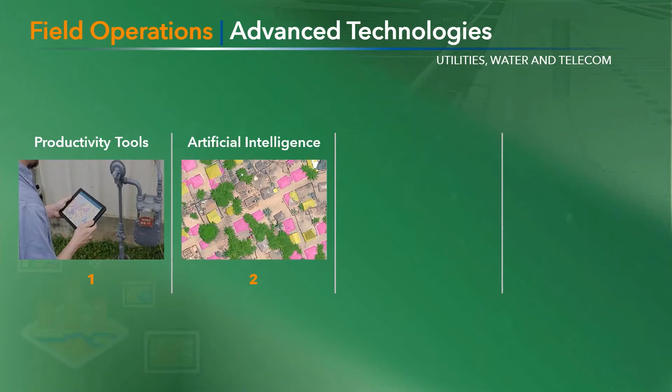Many agencies I talk to want to use imagery and drones, but it hasn't always been easy. We'll see that the state of the art to make use of imagery and drones is straightforward, allowing you to leverage new tools, manage all of the images, and focus on what's important, your infrastructure. We'll end with a look at where things are and where they're going in 3D and what visualization means to field work.

Now, clicking and typing are not great field activities, particularly when you're wearing gloves or you're out in the bright sunlight. Productive field tools leverage the worker's skill and knowledge, and they minimize repetitive tasks. ArcGIS tools work together with many built-in features to improve usability for staff. How could staff avoid a lot of typing? With voice commands and voice recognition.

How can tools remain aware of the user's context? By using barcode scanning to identify equipment and locations, smart tools know what you're working on without typing. How can staff be kept aware in real time? By using information and alerts that are based on location, smart tools know right where you are, what's near you, and then help the user. So whether you're patrolling a line, entering a protected habitat, in a flood zone, or near a gas leak, those things can all help you.

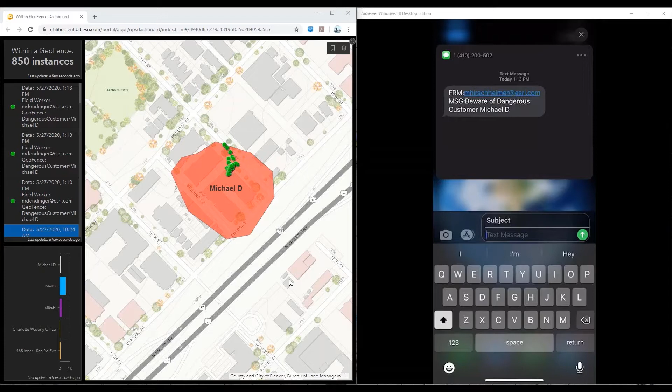Now that I've successfully navigated through all the hazards and reached my inspection area, I can begin to use my mobile device to capture information.

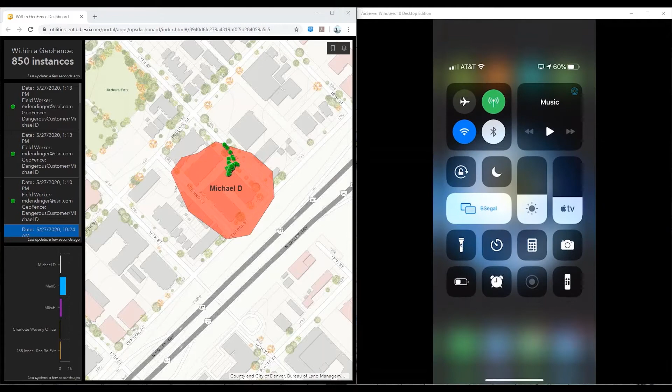Using the camera, I can scan a QR code attached to the pump station, which will prompt a link to open an inspection form. We can see that by scanning the code, some of the fields are pre-populated, like the facility ID and the address. This means less typing and more accurate data.

I'll then fill out the form, so I'll put my name down for the inspector. I'll add a pressure and a rate. And I can even fill out some notes. Maybe there's a component that needs to be replaced.

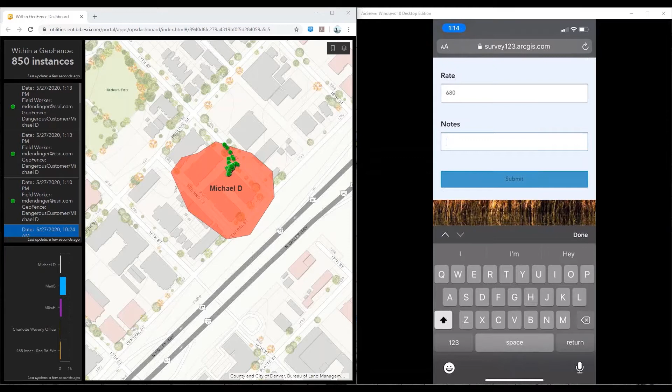I'll use talk to text to fill out that information. Replace rusty valve.

Once submitted, those back in the office can see the current status of this pump station and any future work that might need to be done. So those are just a couple examples of some easy to use advanced technologies that can increase productivity for field workers. So I'll send it back to you, Pat.

Thanks, Ben. Most of the craft workers that I know do not like to type. So I really appreciate that we're using the latest aids to make those apps more usable, like voice recognition that people use when they're texting on their phones every day.

And barcoding has become very prevalent in several of these industries for tracking and traceability. So that fits right in with common workflows. And then getting alerts about what's happening around you is like having a personal assistant. Now, I think that's perfect.

We hear a lot about artificial intelligence. It's already being used in places like online photo services where many people don't realize that they are using it routinely. New computing capabilities find patterns and identify important features, allowing staff to focus their expertise where it's needed most.

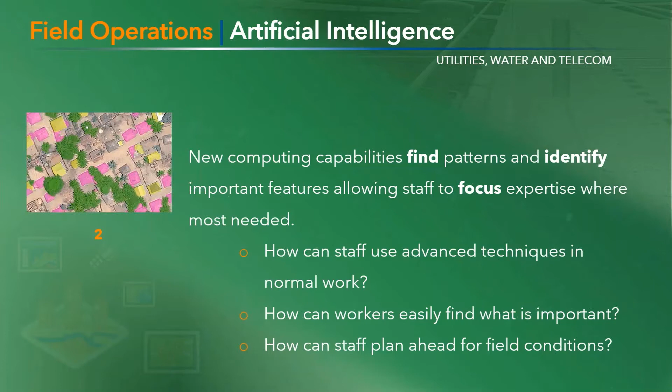As an example, let's look at the capabilities built right into ArcGIS to find things that the field cares about. You'll see how these advanced technologies can be used within normal work. Watch for how workers can easily find what's important and how they can plan ahead for field conditions.

Michael, you're going to show us how AI can find the things that we care about in imagery. Can you walk us through how this could help a crew heading out for a routine patrol inspection? Of course. So today I'm going to show you how we can look at some artificial intelligence processes that will make our jobs significantly easier.

To start with, we can look at some of the artificial intelligence processes that are already baked into the ArcGIS Pro system. For this demonstration, we're going to be looking at a pipeline that a gas utility owns. As per government regulations, the utility must do annual checks on this property and the pipeline with the easement around it to make sure that there are no new structures, waste dumps, homeless encampments, road damage, or anything else that might make it difficult to do maintenance on that pipeline, as well as keep the safety concerns of the individuals in this area in mind.

This includes making sure that we can access this pipeline and do any maintenance necessary. Currently, it is very difficult for an organization to plan this process as they have a lot of land they need to monitor, and the field workers are required to drive the roads, the organization needs to check permits, or they need to have multiple GIS analysts scour images for the desired items.

To ease that workload, we can create a simple artificial intelligence process with some aerial photography taken of the pipeline area. In this map, you can see that we have a pipeline going through a rural area. The utility company needs to make sure that where the new structures exist.

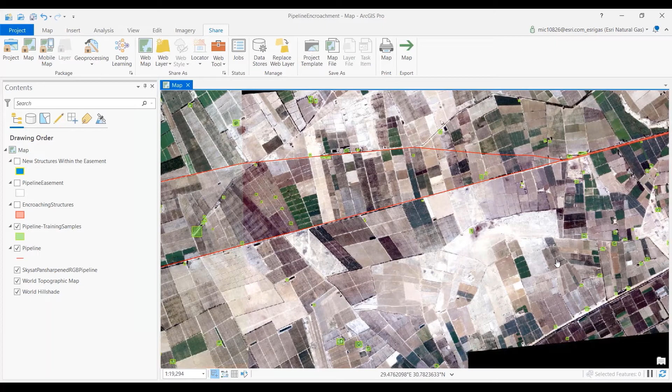To create a layer like this, an analyst really needs to work for about an hour or even less if they have enough training. Once we feel that we have created a sufficient sample of the images we are looking for, the buildings or other items, we are able to run the image classification geoprocessing tool that is in ArcGIS Pro out of the box. For the sake of time, we have that right here.

As you can see, the image classification found quite a few more structures that we care about. This process has saved the utility hundreds of hours to identify all of these structures within this image. As this is an AI model, it can be used year after year in the maintenance of this pipeline.

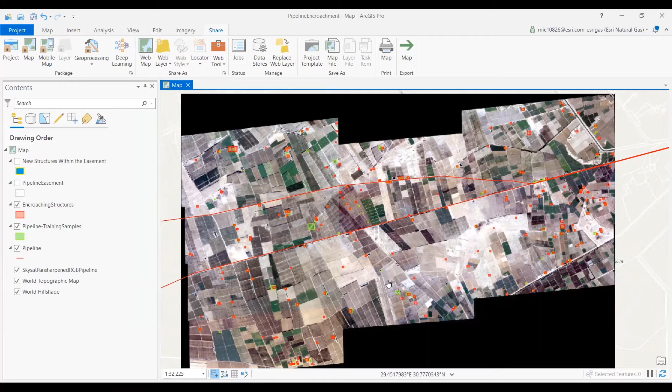However, as we are concerned about these structures, not all of them are exactly what we need to look at for the specific process. To make sure that our field workers are not wasting their time looking at structures that are not within the easement, we can create a simple easement line on our map.

So this easement covers several miles around the pipeline, and we can see that there are some new structures within that area that the utility needs to be concerned about.

Though the utility needs to make sure that they are only visiting structures that are important, we will do a simple selection and only get the structures that are within that easement.

We now have the exact locations of the structures that our field workers need to visit to verify that the pipeline and those in the area are safe and easy to access for maintenance.

Now, this artificial intelligence tool can be applied to a multitude of different processes, whether you are looking for structures or, as earlier stated, waste dumps, homeless encampments. We can also train this to look for damage on assets and a multitude of other things.

You can use image classification processes to eliminate wasted time on scouring images and having your field workers drive through miles of empty road to find something that could have easily been found within ArcGIS Pro and its AI processes.

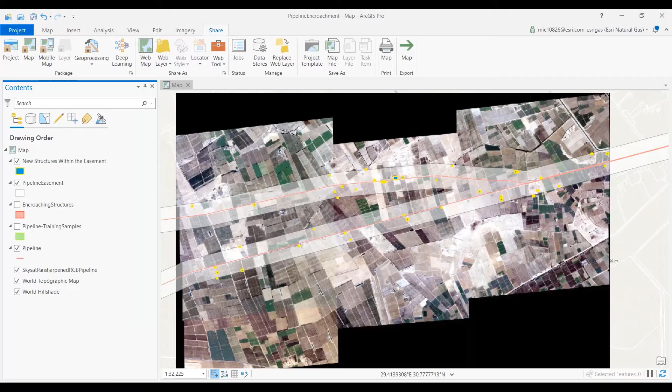Thanks, Michael. So AI finds and helps us focus on what's most important to improve our normal work. It can be used to find other things too: tree clearances, broken hardware, corrosion, even wood rot, all kinds of things that are observable in different forms of imagery from satellites, aircraft, or drones.

But that's what we're going to talk about next, is imagery. Many agencies are using imagery to great advantage for their fieldwork.

I've talked to customers hiring contractors to do this, and those with employees using their own personal drones to go out and look at suspect poles from above where access is very difficult.

Many field organizations want to develop more in-house capability in this area, and ArcGIS has some great tools that tie right into the organization's existing facility map data.

Imagery from satellites, aircraft, or drones shows conditions where access is difficult, time-consuming, or presents safety concerns. As we saw a moment ago, this is a great place to leverage artificial intelligence to inspect tall infrastructure safely and to examine equipment without taking it out of service.

Michael, Esri has a full set of tools for imagery. Can you show us how they can be used for fieldwork?

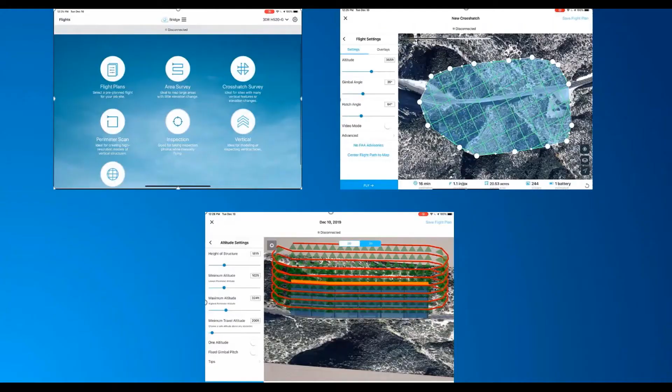out and investigate these towers, to look at these nests, and see what our next steps should be. Now with this, we can send any drone team that we have onto the site to look at this. Once our field worker has reached the tower site, they can easily use our mobile drone collection software to quickly set up a flight plan to investigate this structure.

The mobile application allows our field worker to select flights that have existed before, if this is a structure we've investigated previously, or create a new flight path depending on the need at that moment. Once the field worker has selected the type of path they want to use, they can edit that on their iPad down to the exact formation they want that drone to fly.

Once that has been done, the application gives a simple 3D image of what the flight path will look like, and an estimate of how the structure will exist within that. This also tells us how many photos will be taken during this process, so we can see exactly how much work will need to be done even before we send out that drone

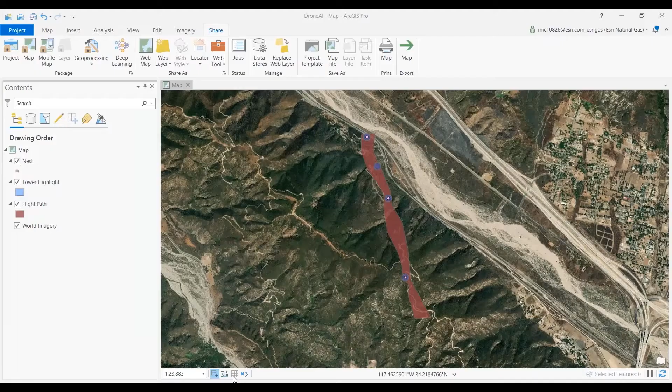to take the images. Once the drone has flown the path and returned to the field worker, they can transfer the images via Bluetooth or an SD card to the iPad for further investigation. Once that imagery has been uploaded, you can simply use our mobile drone collection software to see that all of these images have automatically been stitched together to create this map.

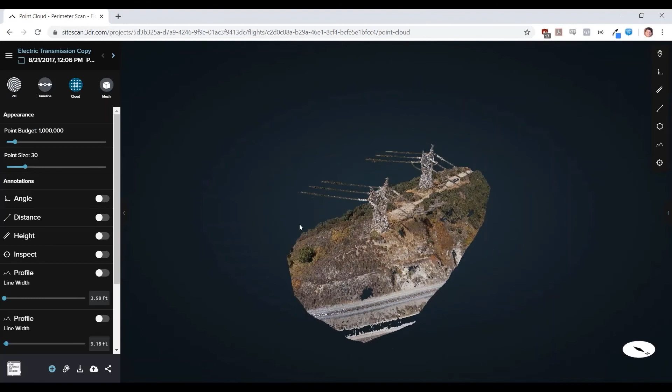Now what we want to do is further investigation on this map in a 3D scene. These are all images taken from any regular drone that can capture images, and it automatically stitched them together to create this 3D image. We can even see our field worker's car here on the road.

As we look at this, we know our nest is in this location from earlier artificial intelligence processes. On the right, you can see it automatically populates all of the images that have that location inside of them. So what we want to do is look for an image with a good angle on that nest, so we can potentially see what is inside of it.

If we select a random image, we can see that the nest exists within this tower. This picture might not be exactly what we're looking for, as there's a pole that interferes with our line of sight. Let's find something that allows us to actually see what's going on inside of that nest. We can see an image of that nest, and inside we can see there are no eggs and no bird in it at the moment.

From here, we can take those images and send them back to our management or environmental team so that we can take steps to look into what needs to be done, whether we need to assign a field worker to remove that nest or talk with an environmental team to make sure it is as protected as possible. One thing our management team might want to know is how close that nest exists to our power lines.

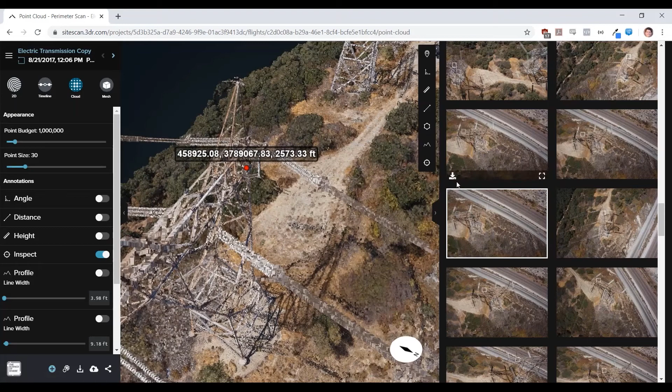So what we can do is simply run a distance check and see that the nest is 24 feet away from our power line. So when we are assigning a work order for someone to remove this nest, we know the safety precautions that need to be taken to protect that field worker.

All of this information can easily be shared back to our management team or the environmental team through organizational resources. With this process, we do not need to send field workers up the tower with risky equipment or have analysts sift through hundreds of images just to identify where this nest may be. We can simply have a drone operator team go to the location, easily set up a flight path, and do on-the-spot analysis of the desired information.

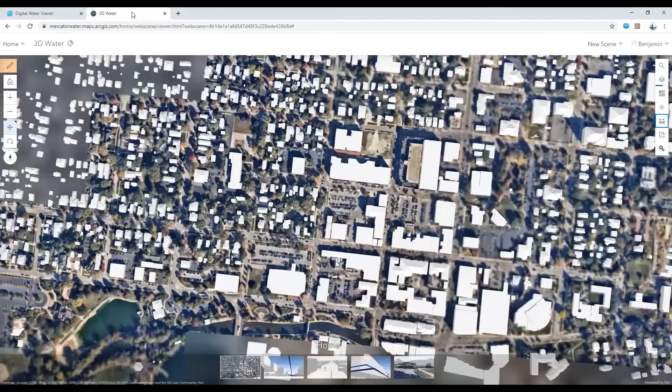3D maps and visualization can help bring utilities data to the next level by providing a more detailed and visually accurate view of their assets. By utilizing 3D visualization, field crews can have a better understanding of what features are in their system, how those features look in real life, and where those features are located.

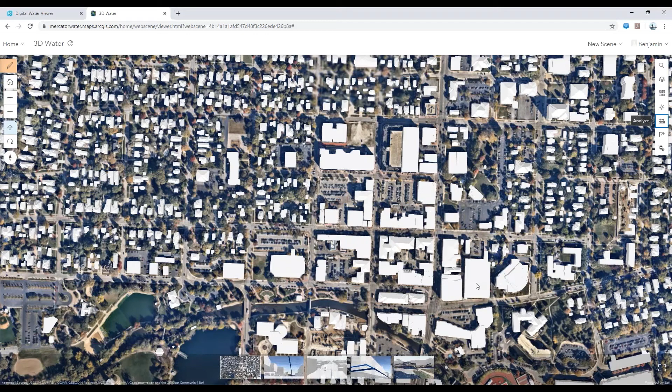So here we have a 3D map of a water system that was created in ArcGIS Scene Viewer. From this angle, the map appears to be featureless. This is because most assets in a water utility are below ground.

As we move our view below the surface, we are then able to see where these underground utility assets are located. We can see water mains, as well as lateral and vertical pipes. From this angle, we can also see features above ground, such as hydrants and building footprints.

When creating 3D maps in Scene Viewer, there are two avenues available. First is to use the 3D environment in ArcGIS Pro to generate 3D features. There's even a solution for water, wastewater, and stormwater that can help with this. The second option is to utilize attribute and geometric information in your 2D data sources, and then using symbolization options in Scene Viewer. For the scene I'm showing here, we're utilizing the second option.

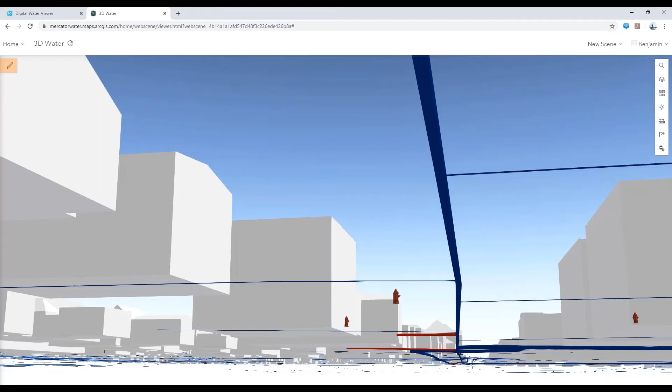This means that all of these utility assets are referencing the exact same data that I showed in the 2D map. Field workers can use an application like this to explore their data, as well as run analysis for project planning in ways that they are unable to do using 2D maps. Using the user-friendly exploration tools, we can navigate through the below-ground environment and see where features are located and what they look like.

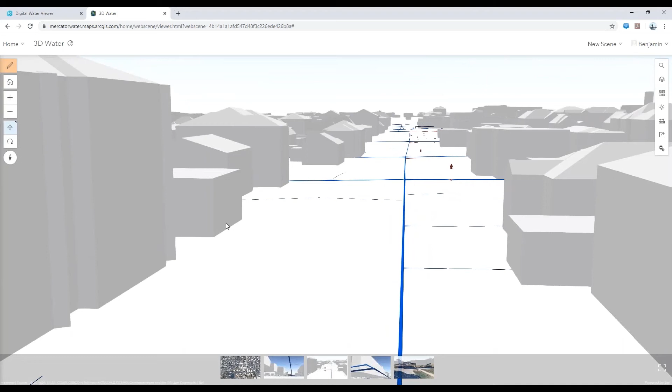Measurement tools can also be utilized to measure distance and area in 3D. For example, we can see that this building right here does not have a service connection. A field worker can use the distance measuring tool to measure the distance between the connection and the main and determine how much pipe they will need to install, and from there, how much it will cost.

In order to get data into the state, there are a couple steps utilities can take. First is getting accurate location data. When mapping in 2D, we are usually just concerned with X and Y location information.

But when using 3D, it's important to understand how far above or below ground an asset is. As JJ mentioned in last week's webinar, high accuracy GPS devices can be used to generate as-built data. As you collect data and your attribute information improves, that information can then be used to create 3D visualizations of your assets. Information such as elevation and distance below or above ground can then be used to visualize where features are positioned in 3D space.

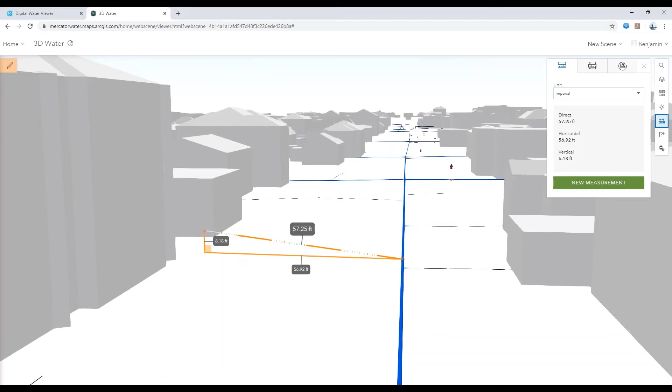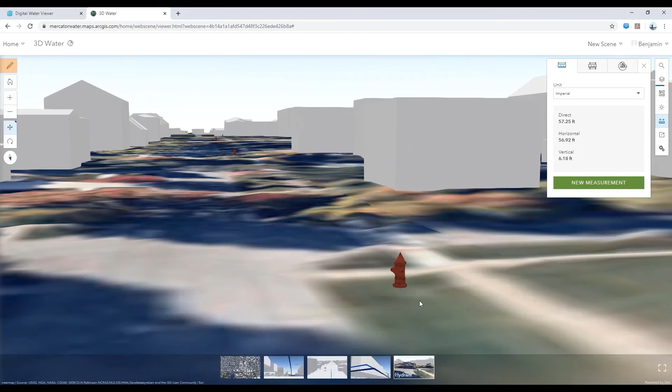It's also important for utilities to have accurate attribute information about their infrastructure. We can use information like diameter to visualize pipe girth. So here we can see a couple different pipe diameter types, as well as how they connect. We can also use out-of-the-box shapes to accurately display features like hydrants. Here we can see a hydrant visualized using symbolization that is included in Scene Viewer. If this hydrant layer contained multiple types of assets, then we could visualize the features differently using an asset type field.

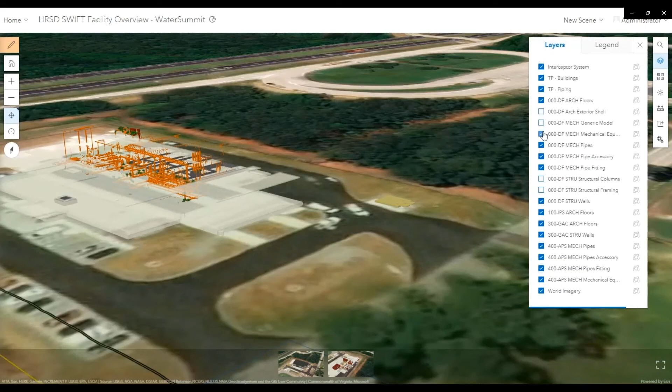3D visualization can also be used for more complex modeling. Here we have a video of a detailed 3D water treatment facility. 3D facility models can be used for safety training and inspection or repair workflows. In the case of a water treatment facility, knowing where exits and safety features are before actually entering the facility can help with responding faster to issues like a chemical spill or a pipe burst. Using this model can tell you exactly which exits to use, where alarm systems are, and which valves might need to be shut off.

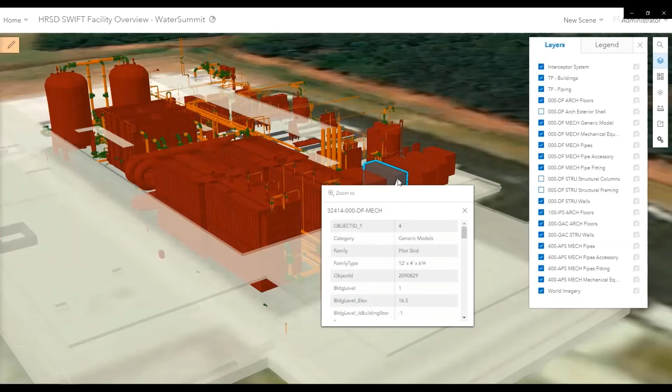Facilities are often densely packed with assets, so knowing exactly where an asset is within a structure and what it looks like can be immensely valuable when performing an inspection or repair. And as data and technology improves, 3D models can eventually be integrated with indoor mapping, so workers can see exactly where they are located within a treatment plant or utility facility. So that's all I have to show for 3D, but I'll let you take it from here, Pat.

Excellent, thanks, Ben. I think it's important to realize that ArcGIS is fully integrated with 3D visualizations from all kinds of data, from almost any source, whether that's from the CAD design and engineering, from actual field inspections, or collected as-built points that were captured at the time of installation. It has applications for augmented reality, and this is where fieldwork is headed.

Well, let's summarize. ArcGIS has productivity tools that make apps user-friendly for field users, making their work better. Artificial intelligence has reached a place where tools are built in and able to help staff find and focus on what is most important. A great place to apply artificial intelligence is in evaluating imagery that comes from satellites or drones to make inspections better in many cases, and everything is moving to 3D. It's built into ArcGIS along with the tools to work with your existing map infrastructure information.